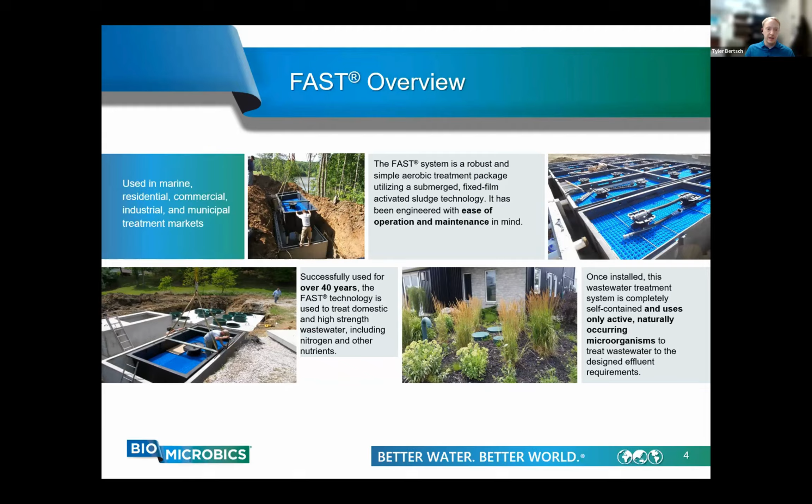The way it operates, it only uses naturally occurring microorganisms, which you see getting flushed down the drain and ending up in what would normally be a septic tank system.

So the advantages for attached growth: it's very easy to start up. There's no seed sludge needed. Essentially, once you have it installed and start passing wastewater through it, you begin treating wastewater within 7 days and you have full treatment within 30 days. It's very simple to operate. It has very good sludge thickening and settling compared to typical activated sludge systems, which you would see in suspended growth.

There's a reduced sludge production due to higher organisms which are present in wastewater. In terms of power and maintenance, compared to normal suspended growth activated sludge systems, we use much less power. Again, we only have that single moving part, which is just a blower. We can have a much smaller footprint than a typical suspended growth system due to the concentration of biological activity which is occurring on the media rather than growing within a large tank of wastewater.

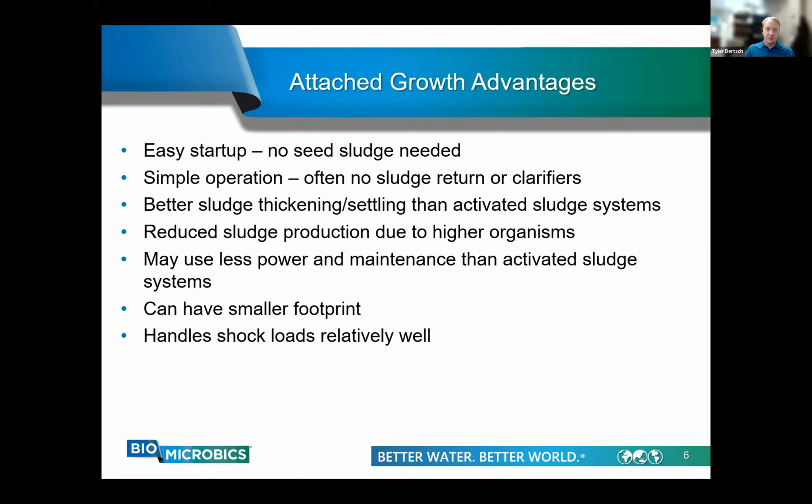Additionally, this sort of system is supportive of ammonia removal, and it's also more resistant to temperature fluctuations due to the fixed film nature of the bacterial growth.

Here's an overview of what sort of products we offer in our FAST line. A RetroFAST is typically for remediation or extending the capacity of an existing septic system. A MicroFAST is for a single family home or a cluster of homes up to approximately 125, 126 residents.

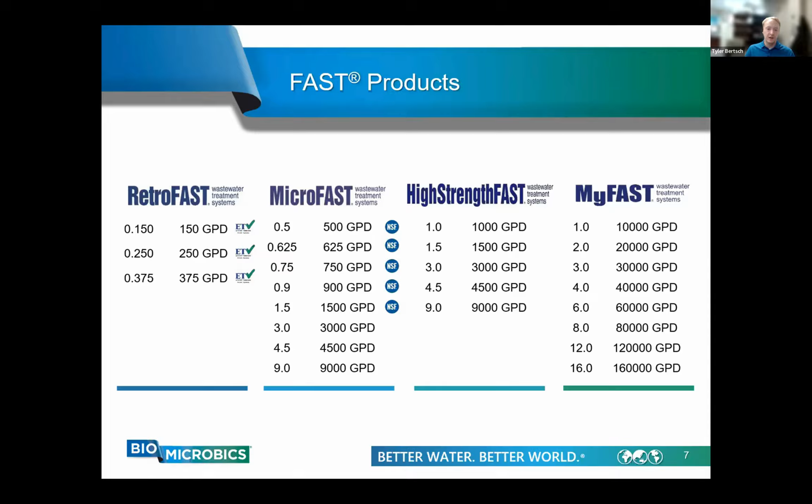Your High Strength FAST is for any situation where you have higher organic loading, such as restaurants, bars, coffee stands, commercial properties, agricultural or industrial facilities with organic effluents. And on MyFAST, we start getting into the several thousands to hundreds of thousands of gallons per day. That's ideal for multifamily properties, subdivisions, apartments, small municipalities, or even high strength commercial properties.

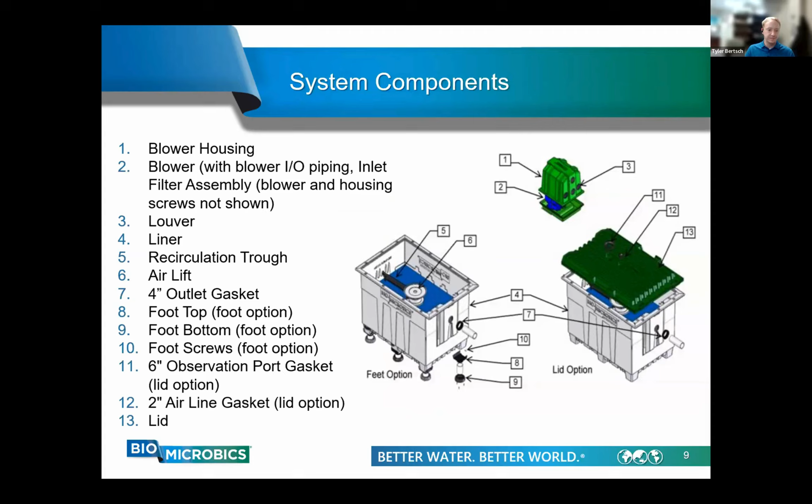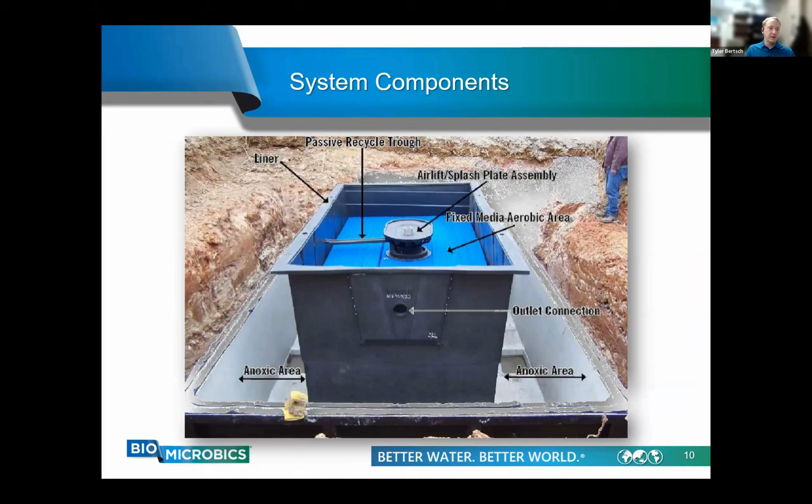Going back to this slide, you can see that the trough extends out of the airlift and goes to the edge of the liner. That is your return into the anoxic area, and that is what's actually facilitating the nitrogen removal.

The Sanitee has a built-in plunger which allows you to clean it in place simply by pulling the plunger up and down to dislodge any accumulated solids. Any wastewater which passes through the Sanitee ends up in the treatment tank, entering the anoxic zone.

The airlift serves as both an aeration and a mixing device, which pulls in the anoxic water up through the aeration zone and spreads it over the top of the media. This is where the biological activity occurs in terms of BOD and COD removal, and that's where the main treatment is happening. Outside of that is where your nitrogen removal is occurring.

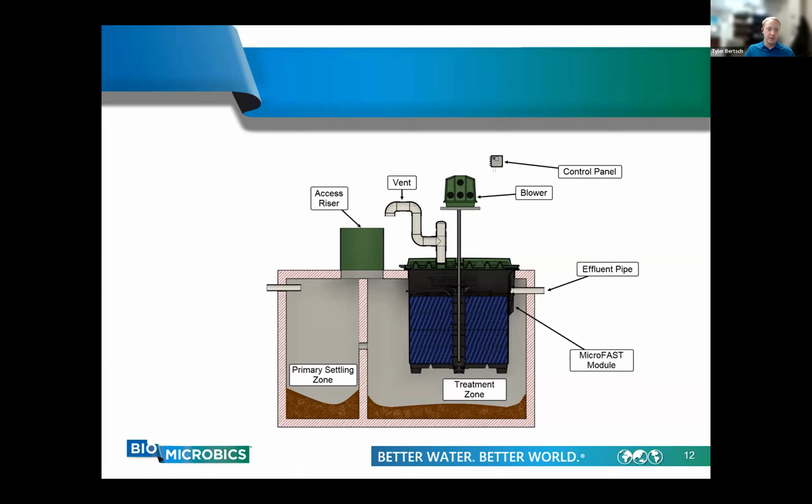Here's another blown up image so you can better see exactly what's happening with the primary zone, the treatment zone, the media, and your effluent discharge, along with the blower and the control panel which operates the blower. Here we have a quick video which shows the MicroFAST system in action.

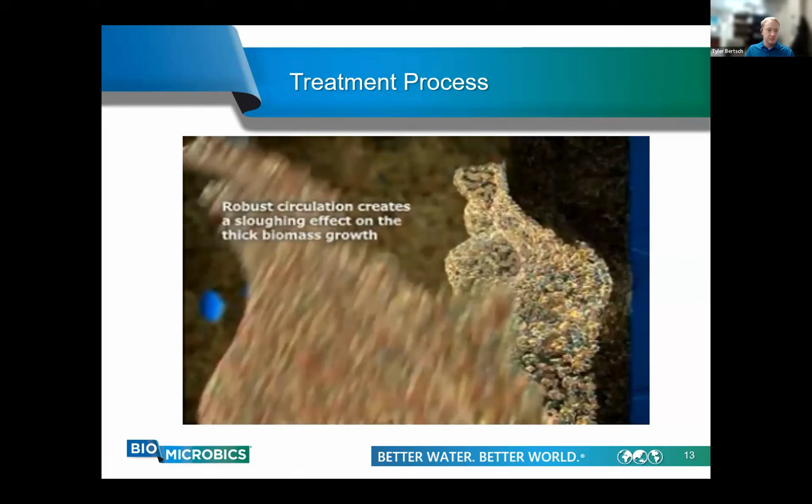All right, moving on.

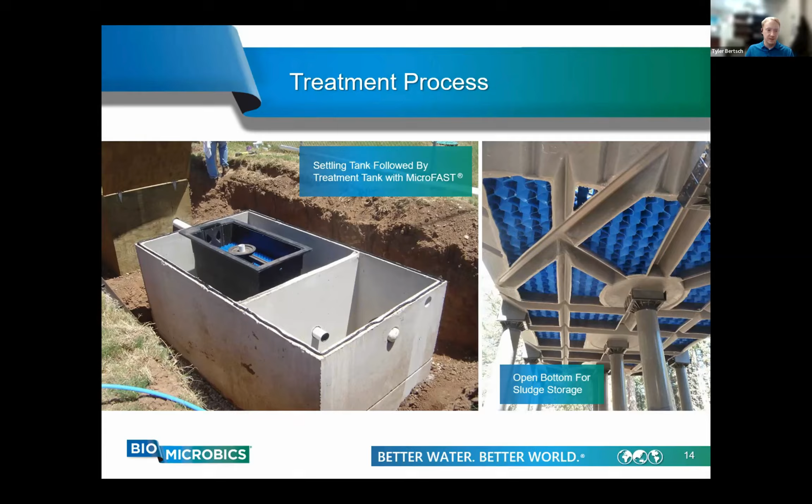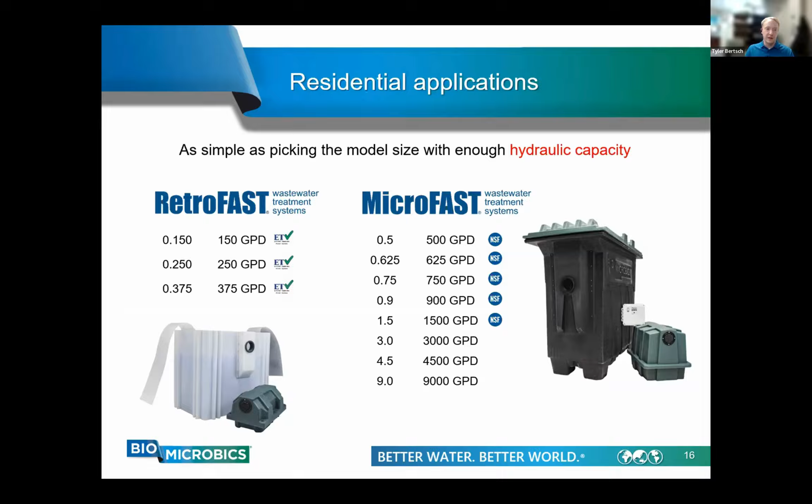Going into the sizing for the FAST system, there are two different ways to size this. For residential applications, you're simply picking a model which has enough hydraulic capacity. So if you're producing 300 or 400 gallons a day of wastewater, you'd be looking at a MicroFAST 0.5, which has a capacity up to 500 gallons per day. It really is as simple as that.

Our systems are designed with these parameters in mind. So any raw wastewater coming in for your RetroFAST or MicroFAST, this is what we're looking at: BOD, which is your biological load, of 300 parts per million or milligrams per liter, your solids of 300, nitrogen of 70, and your fats, oils, and grease of less than 40.

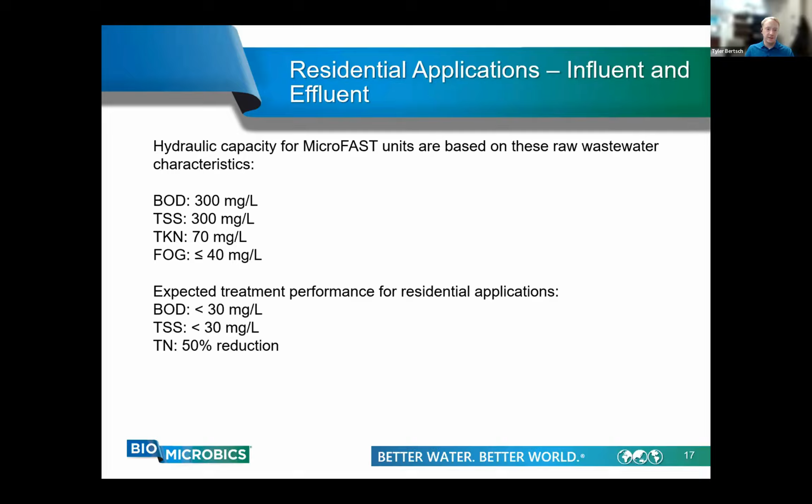Below that, with our typical MicroFAST system, our expected treatment performance for residential applications is less than 30 for BOD and TSS, and at least a 50% nitrogen reduction.

For commercial applications, we start getting into a little bit more here. So not only are we looking at the hydraulic capacity, we're also looking at the organic capacity, which is the BOD concentration. Each of these units is rated to handle a certain amount of BOD coming in, which we measure in pounds per day.

We use the high strength FAST when your influent BOD exceeds the standard 300 milligrams per liter mentioned previously for influent conditions. For example, if you had 1,500 gallons per day coming in with 1,000 milligrams per liter of BOD, that's approximately 12.5 pounds of BOD per day. We would select the 9.0 model, even though the hydraulic capacity exceeds the 1,500 gallons per day, because that's what's rated for 12.5 pounds a day of BOD. You'd have extra retention time, but that is in no way a detriment to your treatment process.

We also have the capability for additional nitrogen removal using our NitriFAST and ABC-N system. Our NitriFAST is used to convert the ammonia that's coming in, and your ABC-N is what's used for something called denitrification.

Nitrification is the process of converting ammonia to nitrates. Denitrification is turning those nitrates into nitrogen gas. These units will always follow a primary treatment system, and they use specialized media ideal for removing nitrogen compounds. Typically, nitrogen removal units have about the same hydraulic capacity as your primary FAST treatment unit, but have a smaller footprint. The nitrification and denitrification processes also produce less sludge than your main FAST unit for BOD and TSS removal.

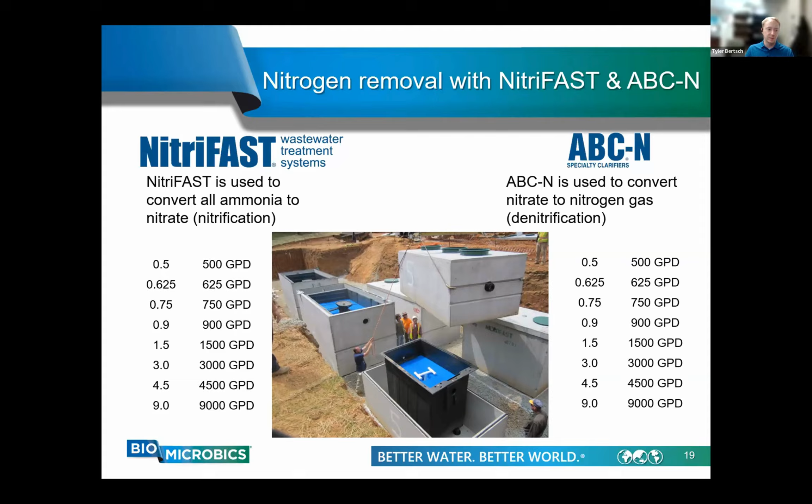Here's a quick block flow diagram describing different setups for nitrification or nitrogen removal. In your typical FAST system, this is what we're looking at for 50 to 75% nitrogen reduction. We include an additional recirculation, which recycles the effluent coming out of your FAST system back to the beginning, giving it greater time to undergo nitrification and denitrification. If you're including denitrification with an ABC-N or NitriFAST, we're then looking at the second diagram for greater than 75% nitrogen reduction.

With these, you can include an alkalinity source and a supplemental carbon source. Alkalinity is added because the nitrification process will actually make the water more acidic, part of the biological process occurring here. The bacteria performing this operation work best in a pH range of 7 to 9, so you need to regulate this because the water's pH can drop down into the 5 to 6 range. The general rule of thumb is you require 7.1 milligrams per liter of alkalinity for every 1 milligram per liter of total nitrogen removed.

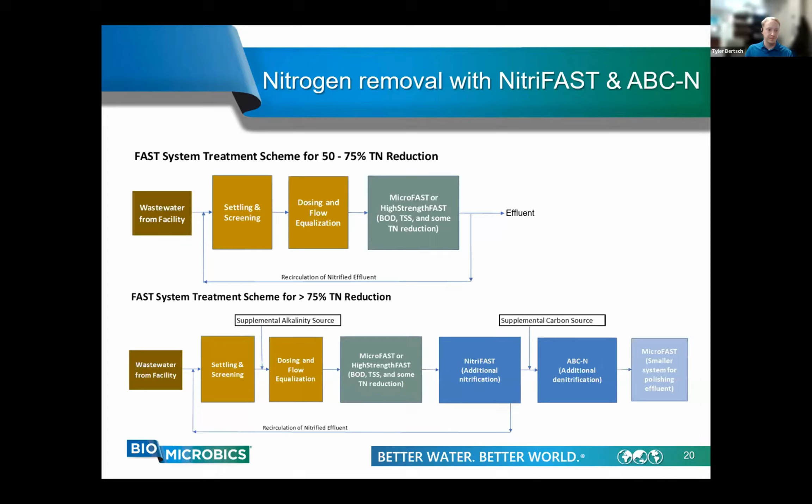And then I already touched on this a little bit. Complementary products for FAST: we already mentioned Sanitees, which are just effluent screens to prevent any sort of solids from entering the treatment tank.

We also have Lixor aerators, which are designed to reduce influent BOD by up to 50% prior to the FAST system. We often see these with larger systems such as your MyFAST, or they could even be installed in something like a MicroFAST 9.0 if additional aeration is needed but you don't need that hydraulic capacity. Sanitees are sized based on your influent flow rate, and Lixors are sized based on the installed tank depth and your BOD loading.

So going into community and municipal treatment, we begin looking at the MyFAST and the MacroFITT. The MyFAST and the MacroFITT are essentially just scaled up versions of your regular FAST modules with additional features you'd expect to see in municipal wastewater treatment systems, such as biosolid management systems.

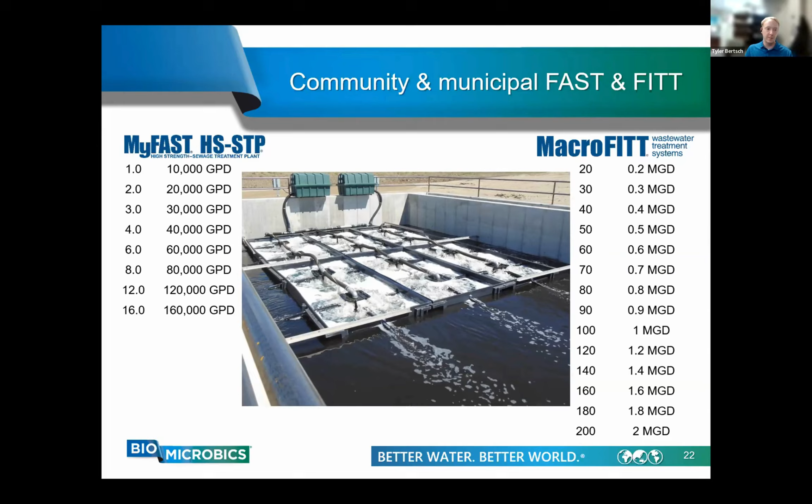Here's a block flow diagram of what you'd see for a typical MyFAST or MacroFITT process. You have your AMS, which is your aeration management system, your primary aeration and screening tank. Into there, you go into the actual treatment tank, which is your MyFAST with your attached growth, liners, and media. Any sort of settled biosolids go down and can be automatically pumped out, or an operator can just turn on sludge removal pumps, which then discharge into the BMS, which is the biosolids management system.

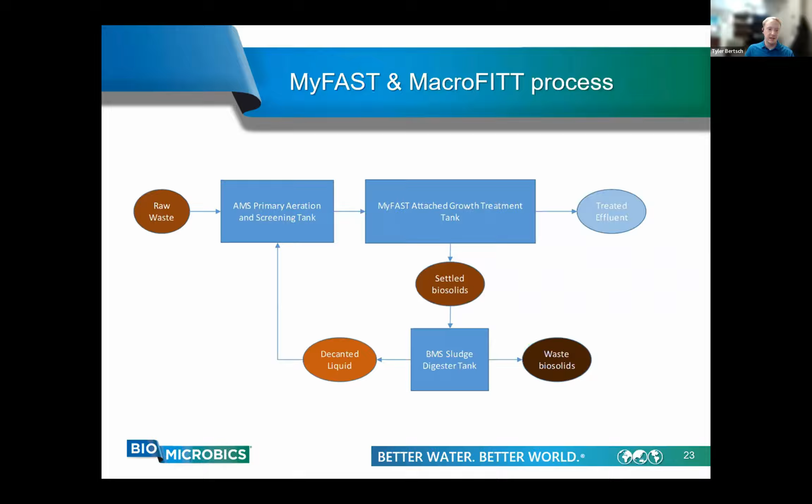From there, we can decant that liquid back into the treatment process, and any of the other waste solids can just be pumped out as needed.

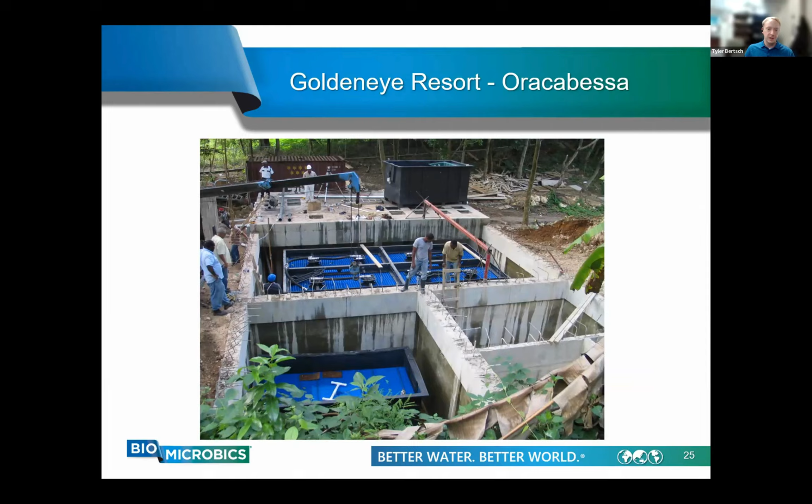As an example, Goldeneye Resort in Jamaica, this is a treatment system which Anthony will be speaking more about later, but it is currently in operation and it's used to treat wastewater from the resort, and it is used to produce irrigation water for water reuse.

Here's another system which is currently in operation in Mexico, Tren Maya in the Yucatan Peninsula. It was designed and built to service a railway station, treating about 50,000 gallons per day of sanitary wastewater generated from the passengers and employees at the train station. There was a strong pressure to preserve the local ecosystem, even though this was in a very remote location, which was hard to access and hard to service.

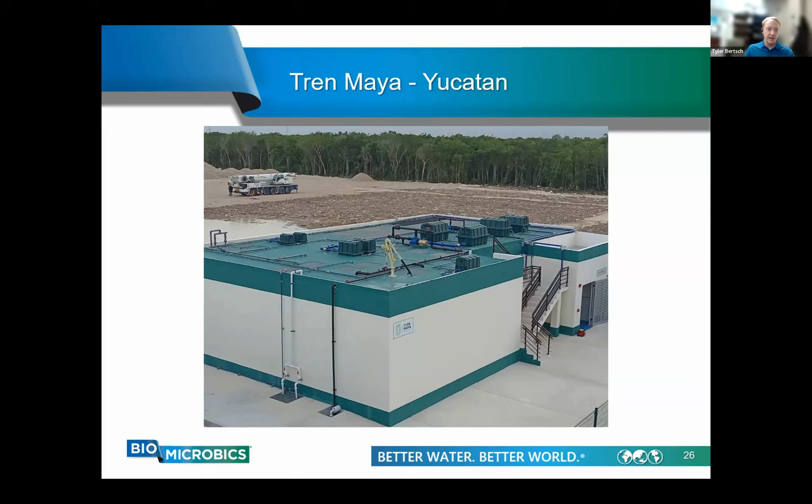The system was designed to mitigate environmental impact on the sensitive ecosystem and is currently successfully treating the wastewater to water reuse standards. It's able to be used for toilet flushing, irrigation, and any sorts of those purposes other than drinking water.

This is a site which I have visited myself, in Arlington, Tennessee in the United States. The previous wastewater treatment system had failed, and they contacted our distributor and BioMicrobics for a replacement unit. This unit was to be servicing a newly developed community of approximately 700 homes and needed to be treating about 120,000 gallons per day, with the flexibility to expand along with the community growth, which they anticipated.

A MyFAST 12.0 was installed, which is effectively treating the wastewater and is discharged to a large irrigation field to support water reuse. This site right now is currently undergoing expansion, and they are using an additional MicroFAST along with that as well.

What's to highlight here is these are modular systems. If you anticipate growth, it is quite easy to add additional treatment units in to provide that capacity that you need.

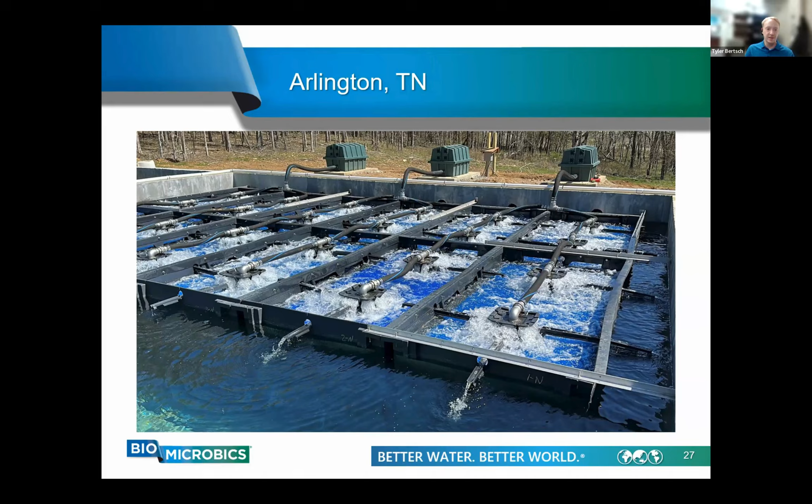Moving on to what would be our more advanced technology would be the BioBarrier, which is our membrane bioreactor. The membrane bioreactor is very, very different compared to our typical FAST system. It operates on different principles, and it produces a much higher quality effluent.

It uses a semi-permeable material, which filters out undesirable materials and produces very high quality effluent. MBRs are an established technology which have been used in municipal, commercial, and industrial wastewater treatment systems for a great number of years now. BioMicrobics has been developing and testing our own MBR technology for over 20 years now, and again, we mostly focus on decentralized applications and on-site water treatment for this technology.

So membrane types are differentiated both by their shape and by their pore size. Their pore size really dictates the function, and the configuration, whether it be flat sheet or hollow fiber, is both a preference and comes down to the needs of the user.

So the biobarrier, we are in the ultrafiltration range. As you can see on this diagram, from left to right, your pore size increases. With increasing pore size, you begin to allow more materials to pass through without being captured by the filter.

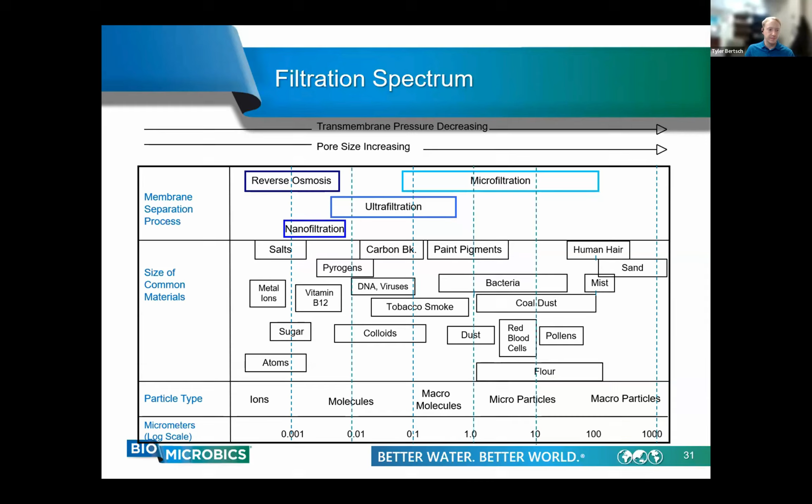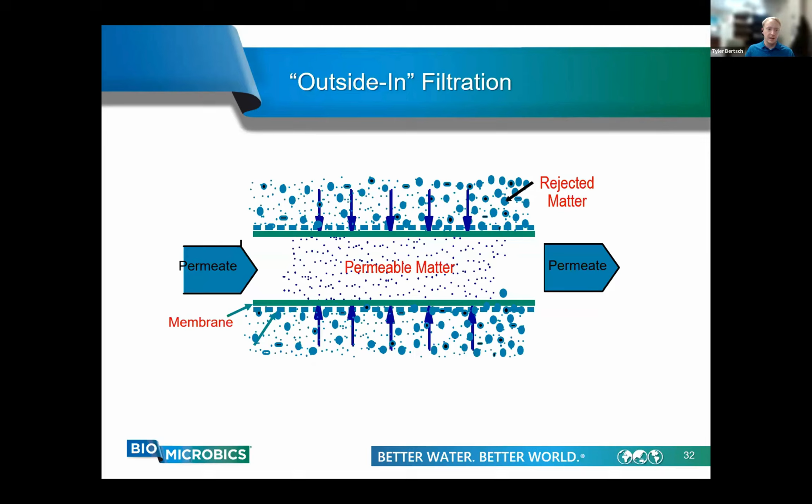So this is how the membrane system works. You can consider it as outside-in filtration. In between those two parallel green bars there, that's the inside of the actual membrane sheet itself. Water is able to pass through. The water molecule is smaller than the pore size, but any material above that ultrafiltration range is rejected. So that's where your solids, your bacteria, anything like that is left behind, and all you're producing is very clean permeate.

So why use an MBR over a typical FAST system? This is something that we can help you decide depending on your treatment needs and your effluent requirements. Any regulatory bodies might have requirements for you, and we can help you determine what product is best for your needs.

So comparing this to a typical FAST system, your BOD is going to be less than 5 milligrams per liter, and your TSS is going to be less than 1. Typically we see non-detectable levels. It's not uncommon to see non-detectable BOD and TSS in our effluent. Your turbidity, the water is going to be essentially crystal clear coming out.

Without any disinfection, as I mentioned, you're able to remove coliform bacteria. We have the capacity to implement nutrient removal such as nitrogen or phosphorus. The effluent is suitable for water reuse, whether that be toilet flushing, irrigation, fire water, and it meets surface discharge standards. We're able to meet the most stringent discharge standards when using this system.

So along with this system, there are some cons that people need to be aware of before they decide to implement this product. It is going to be more complex and more expensive. It does require a level of operator training and a level of understanding of the system to ensure it's operating properly, while the fast system is essentially set it and forget it. This system does require some maintenance.

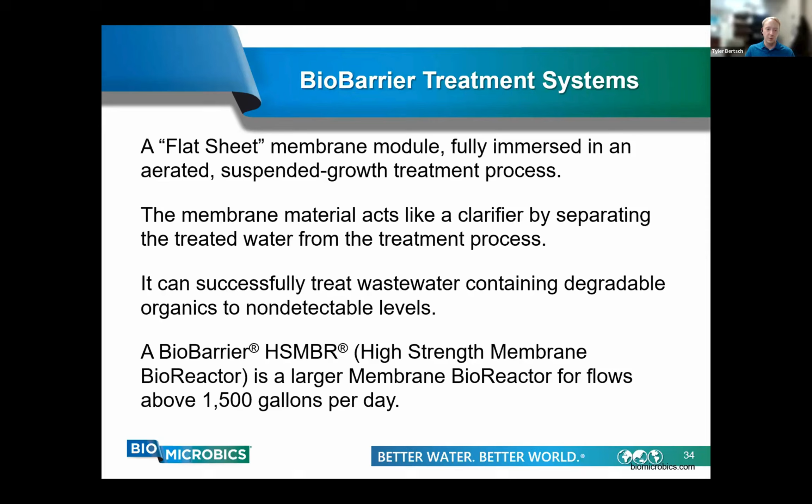Something of note here is that these operate very well with aggressive cleaning practices, which are commonly seen in medical facilities - we'll touch on that in a moment. These use a control panel which operates locally, but it's compatible with any third-party remote alarm system. There is a dry contact alarm output included in the control panel board itself, which is quite easy to wire up.

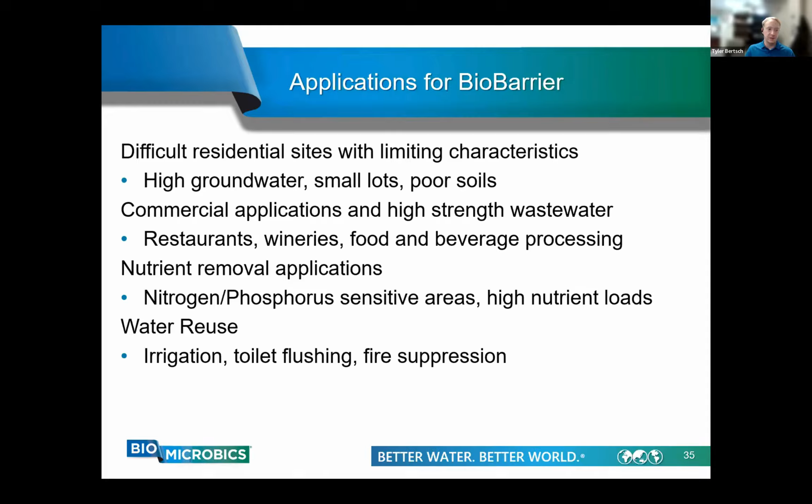So some applications for your biobarrier. It's good to use in places with high groundwater, small lots and poor soils, which can be difficult to discharge typical wastewater effluent onto. It's excellent for commercial applications with very high strength wastewater, such as restaurants, wineries, food and beverage processing. We have a specialized model to meet the needs for wineries as they are a bit more unique. We're able to provide nutrient removal, such as nitrogen and phosphorus, for sensitive areas, and it's great for water reuse applications such as irrigation, toilet flushing, and fire suppression water.

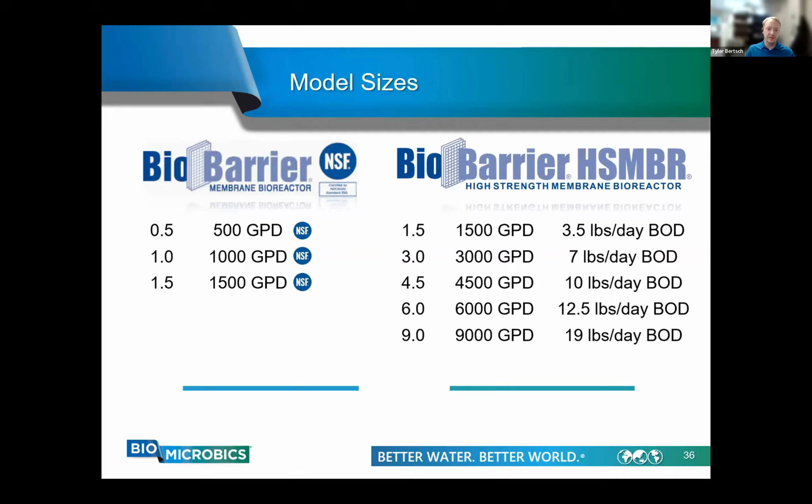The model sizes for our biobarrier are sized pretty similarly to our FAST systems. The standard biobarrier model is based on hydraulic flow rate, and the high strength biobarrier is sized based on the biological load, the BOD, and the hydraulic loading.

Here are some examples of our products both being installed and in operation. Top left here is a biobarrier unit currently in installation before the tank has been filled. The top right is a food processing facility, and the bottom left is a winery project. It's worth noting that commercial facilities might want to use multiple trains to allow for redundancy. This allows for constant effluent production while one of the membrane units is being cleaned, replaced, or in a long-term relaxation cycle.

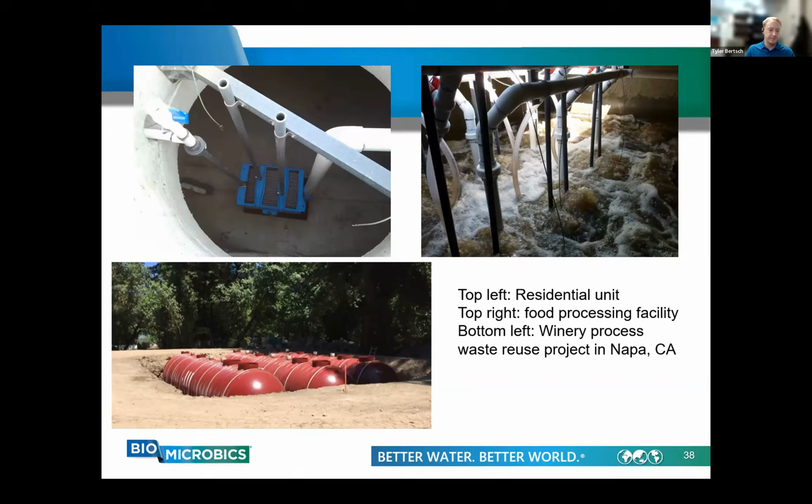We do have the capacity here to provide anoxic recirculation for nitrification and denitrification. That's not pictured here, but we'll be seeing that coming up. And finally, the membrane module itself, listed as number 4, is filtering out your treated wastewater and then discharging it.

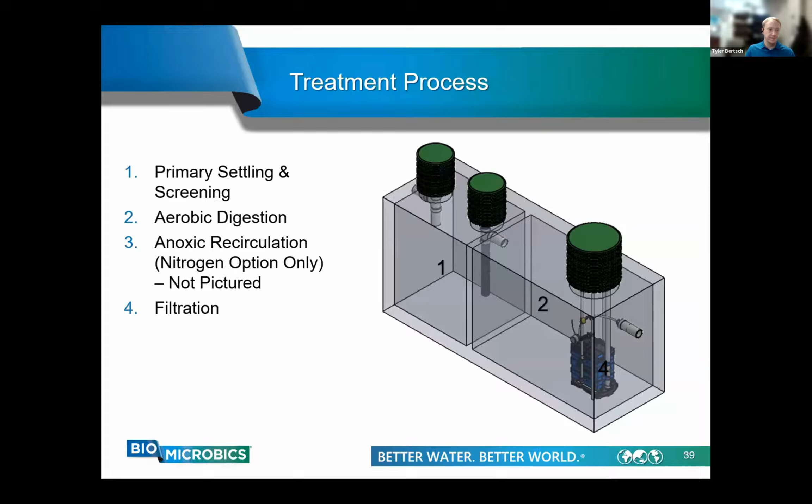I mentioned aerobic digestion, which is what both the biobarrier and the FAST systems work with. In the biobarrier, organisms are suspended in the mixed liquor, as opposed to the FAST system which uses fixed film growth. Air is supplied by coarse bubble aeration, which allows for both mixing and aeration, and to clean the membrane panels themselves on the biobarrier.

The air supply rate needs to be calculated for non-residential applications. That's something we take care of here at BioMicrobics, or with your vendor or distributor, and we'll make sure it's sized appropriately for your needs. There's no need for the customer to be involved with calculating aeration requirements.

This is a general layout for what you would typically see in a residential application. Again, wastewater comes in, goes into the settling tank, fine solids are screened out, and then it passes over into the aerobic digestion tank where it is vigorously aerated, and the effluent is screened out using the membranes and then discharged.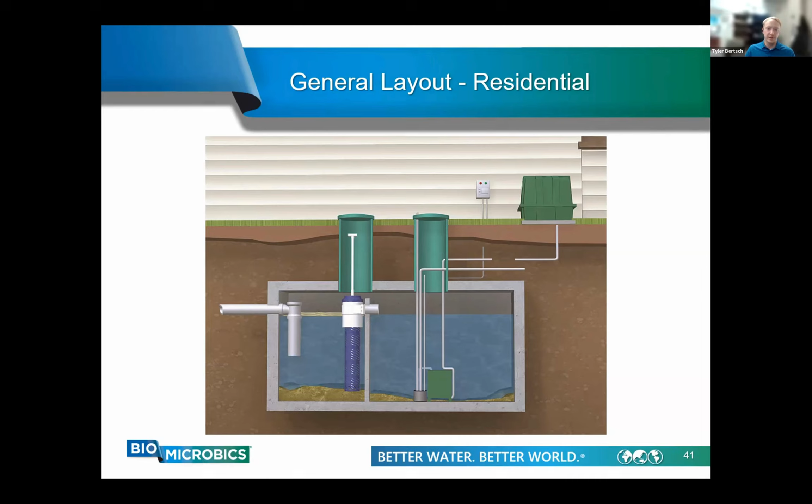It's worth noting here that the SaniTEE again has that plunger available, visible for your clean in place, just to dislodge any accumulated solids or anything that may be at risk of clogging the screen itself.

Here are some system components that you would typically see with your biobarrier. You're going to have your blower housing and blower assembly along with your control panel, which is what you'll also see with a FAST system. Your SaniTEE, which is a requirement for your biobarrier, but optional for your FAST system.

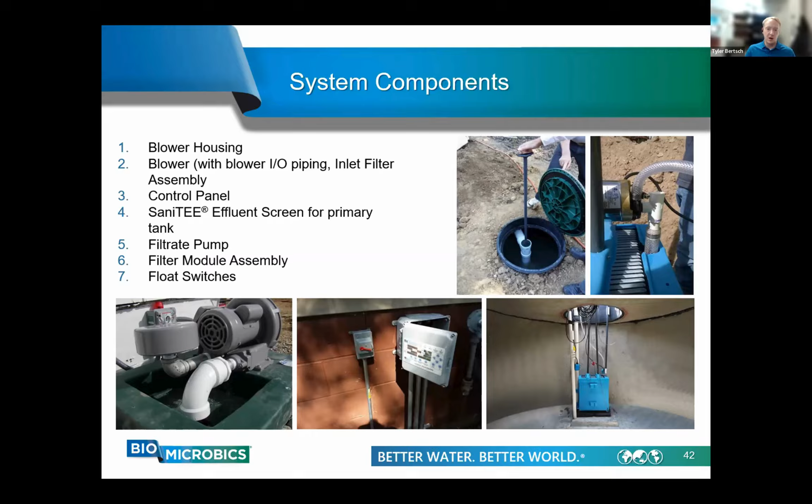What's different here is we have a filtrate pump, so the water that is screened by the biobarrier is pumped out rather than gravity flow out compared to the FAST system. You also have your filter module assembly, which contains the housing, the aeration unit, all of your clean in place requirements, your aeration tubing, and any hold downs needed for the biobarrier itself. Along with this comes float switches, which can trigger a high level alarm so you know if the biobarrier is not functioning properly and not discharging the proper amount of water, so you know the system needs to be cleaned.

So moving into the high strength MBR variant. These are ideal for multifamily residential systems where high quality effluent is needed. We'll be looking at some of those cases later on here. It's also ideal for commercial and agricultural or industrial facilities with high organic loading.

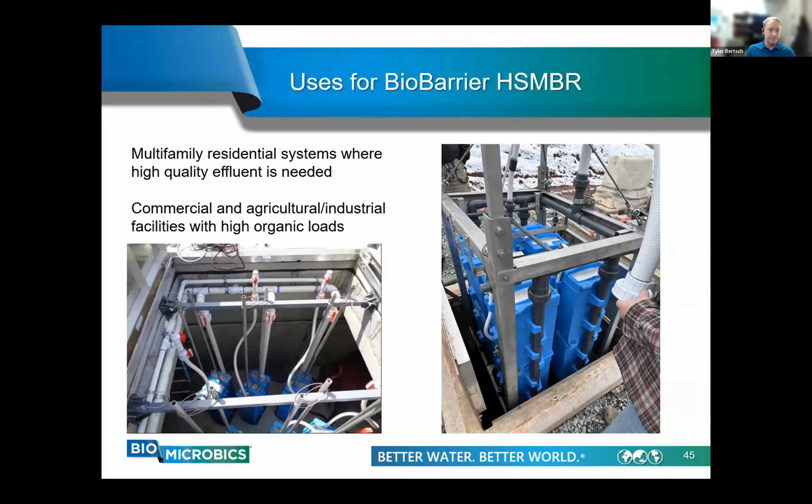So here we're looking at a high strength MBR for BOD, TSS, and ammonia reduction. This would be a standard configuration, so we would not have an anoxic zone. This is ideal for BOD and TSS reduction. You do also see quite a bit of ammonia removal here, but we were not really going into nitrate reduction because we do not have that anoxic zone, which facilitates that nitrate reduction through denitrification.

It is worth noting here that an equalization tank is optional, and this alkalinity feed is listed purely as an example of if there's not enough alkalinity in the incoming water to facilitate your ammonia removal, going back to that ratio which we touched on earlier.

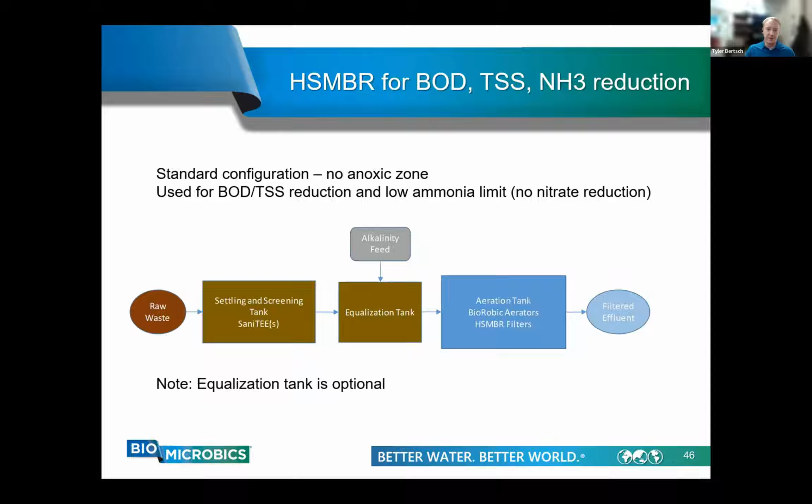So I mentioned before that this system does facilitate nitrogen and phosphorus removal. We're going back into that alkalinity and carbon feed to meet those requirements. We can achieve total nitrogen concentrations of less than 10 milligrams per liter when you include the anoxic tank.

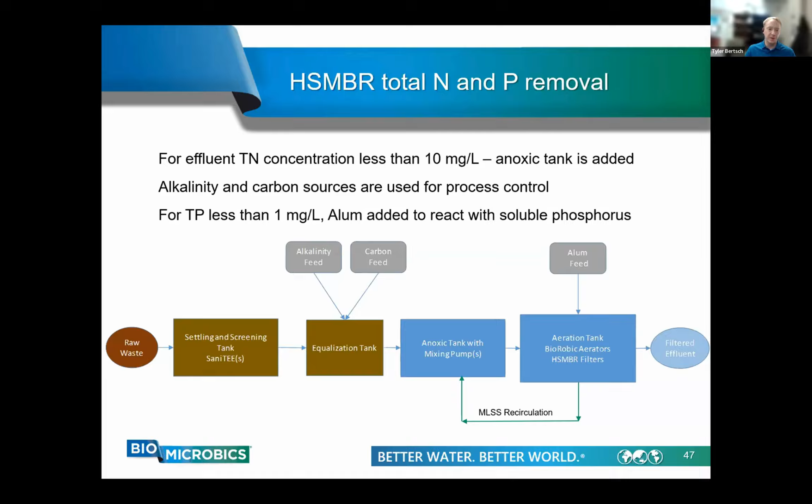The alkalinity and carbon sources are again used for process control. For phosphorus removal, we typically include an alum or a ferric chloride chemical feed, which reacts with the phosphorus. What that does is it binds with the phosphorus and causes it to precipitate out as a solid, which is then able to be screened out by the biobarrier unit. The result of all of this is filtered effluent with low nitrogen and phosphorus content.

So I briefly mentioned this before, for sizing your high strength biobarrier, it's going to be sized based on hydraulic capacity and your organic capacity, your BOD loading, which is coming in. Any sort of biobarrier which is designated with the -N is stating that it is for nitrogen removal as well. And I did mention those special winery versions which are available.

In this example, we have 3,800 gallons per day coming in, and we have a BOD load of 20 pounds per day. We don't have a listed biobarrier unit which is rated for 20 pounds per day. But if we include a BioRobic 2.0, which is capable of removing 10 pounds a day per BOD, we're able to go from what could have been a 9.0 plus another smaller unit or multiple 4.5 units down to a single 4.5 unit and a single BioRobic 2.0. So again, this really does help with saving on membrane costs, maintenance costs, anything like that.

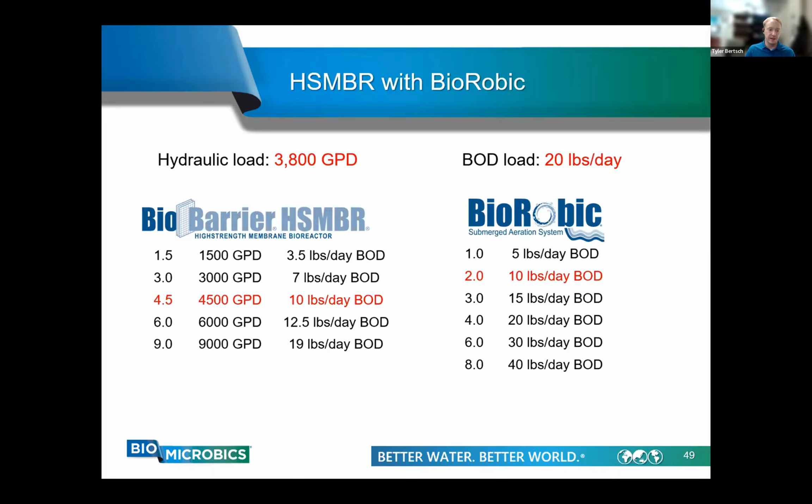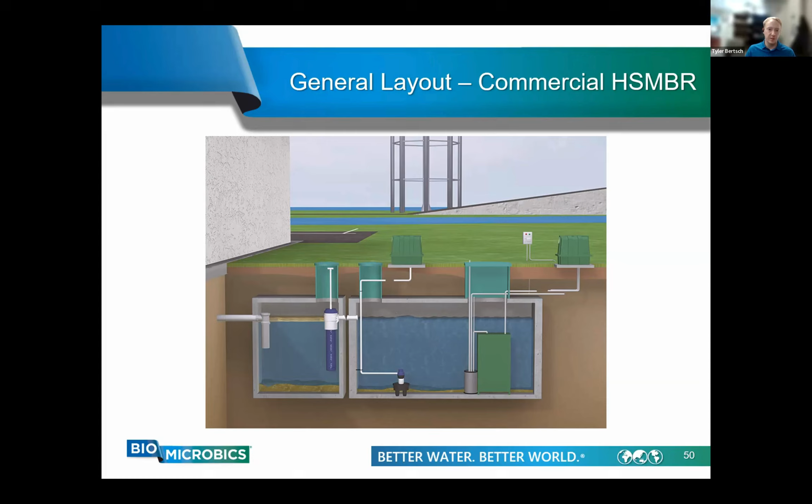In typical treatment systems, that would be very difficult to treat, but using membrane technology, we're able to treat these difficult wastewaters down to BOD levels which are non-detectable, and total nitrogen below 7 milligrams per liter.

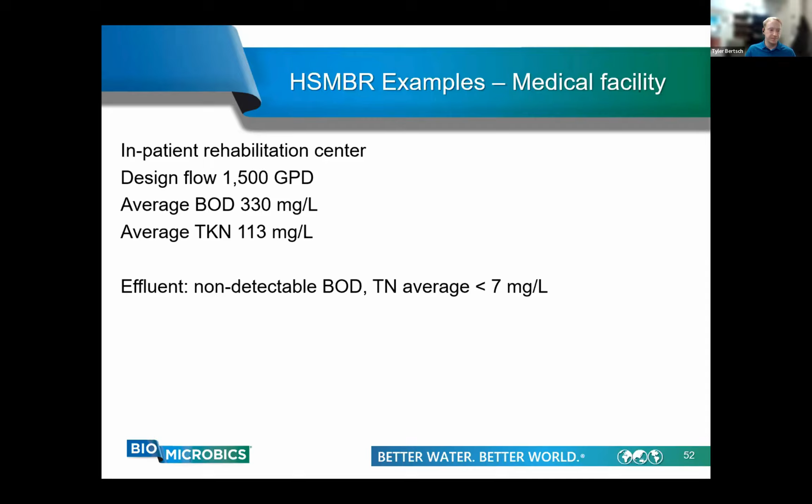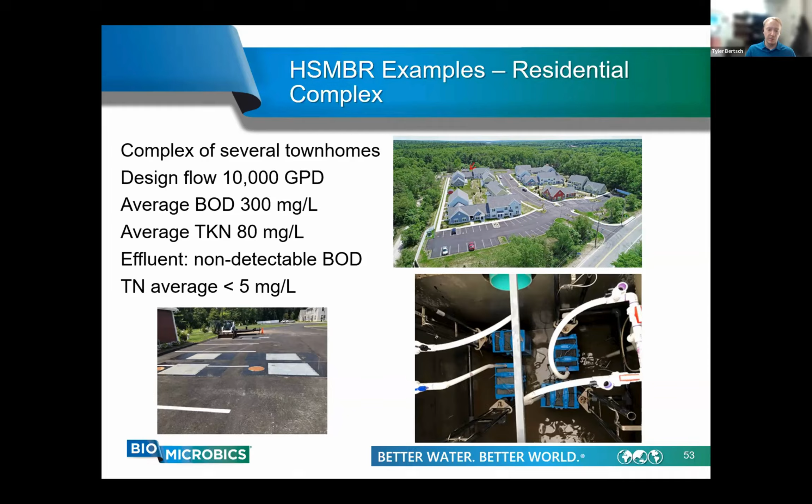The effluent has been tested on multiple occasions since it was put into operation in 2019 and has consistently been below that regulatory threshold. At this time, the system is still operating and serves as a high-performing reference for all of our other projects with strict wastewater restrictions.

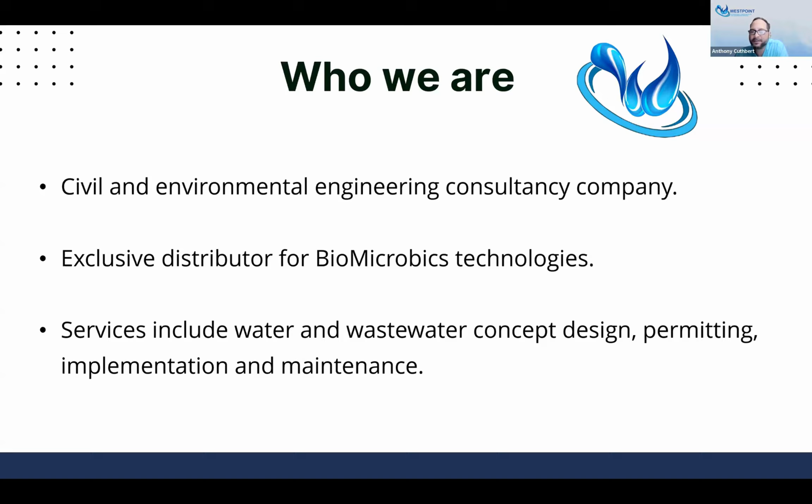Our mission at Westpoint is simple yet powerful: to provide innovative, sustainable, and compliant water and wastewater solutions that streamline development while protecting our environment.

We focus on 3 pillars that guide everything we do: sustainability, solutions that tackle challenges at every scale while preserving our precious resources for generations to come; efficiency, strategies that maximize output, minimize waste, and deliver results that matter; compliance, a steadfast commitment to regulations and safety standards, ensuring public health is protected now and in the future. Now imagine how these pillars can transform water and wastewater management, creating smarter, safer, and more sustainable communities.

With our mission and guiding pillars in mind, let's look at how this translates on the ground into real operational impact. Westpoint is proud to introduce 5 state-of-the-art biomicrobics plants strategically located to serve communities efficiently and sustainably in Jamaica.

These plants are the Golden Eye plant in Oracabessa, St. Mary; Silver Sands in Trelawny; Bessa Living, also in Oracabessa, St. Mary; Portway 2 in Cherry Gardens; and Palm Beach in St. Ann. These 5 plants are more than infrastructure. They are living examples of sustainability, efficiency, and compliance in action, delivering on our promise to their communities and the environment alike.

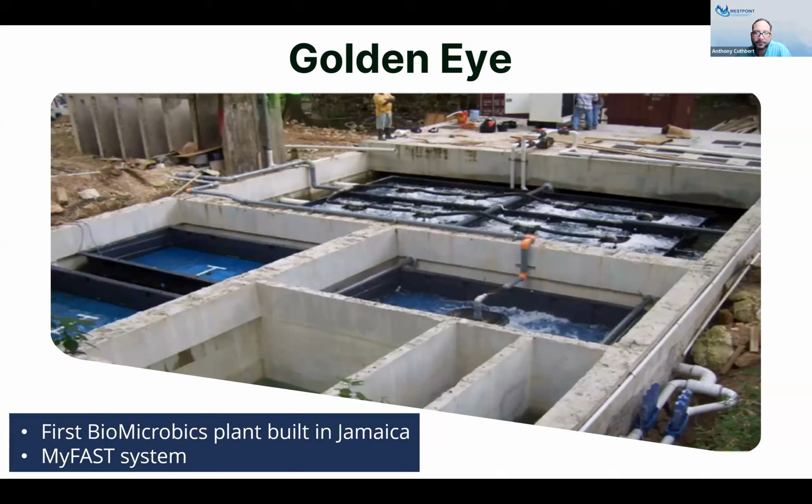The Silver Sands development boasts one of the best beaches in Jamaica. With this in mind, homeowners were looking for a solution that would not affect the quality of the ocean water in the bay. The original facility that was designed when the development was in its initial stages of construction showed signs of degrading ocean water quality based on sample testing performed by the Homeowners Association.

The wastewater treatment plant designed for this facility has the following attributes. It is MicroFAST 9.0, capable of treating 9,000 gallons per day. It has a reed bed associated with it for nutrient removal. The effluent disinfection incorporates the use of chlorine tablets. Treated effluent is disposed into a soakaway pit adjacent to the beach, and the facility has a footprint of 27 feet long, 10 feet wide by 8.6 feet deep.

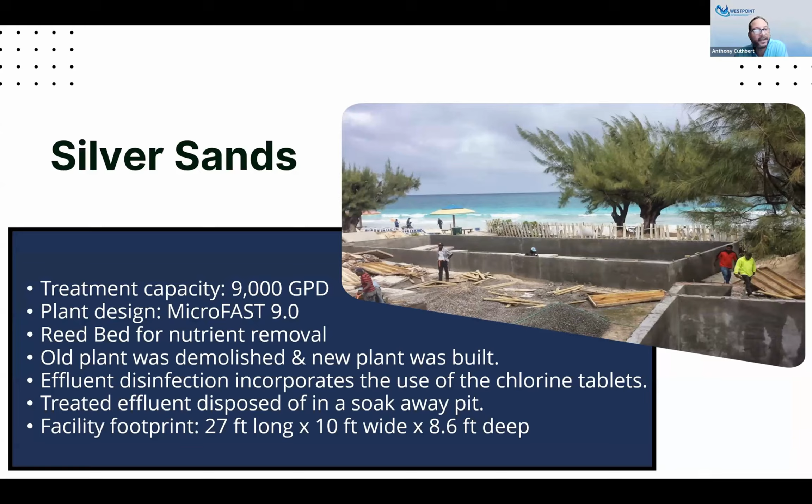The first BioBarrier HSMBR membrane system that Westpoint built in Jamaica was for the Bessa development in Oracabessa. Special requirements for this project were as follows: the property is located next to a river and is on the ocean. The public beach serving the community also serves as a turtle nesting ground. As a result, effluent quality is of paramount concern.

This development had an old defunct wastewater treatment plant that needed to be demolished to build a new one.

Westpoint acquired this job for the following reasons. We were able to cut the price for the wastewater treatment plant by $500,000 USD as compared to our nearest competitor by utilizing the old wastewater treatment plant reactors to house the new HSMBR equipment.

We were able to also gain an irrigation permit from NEPA to use the plant effluent as an irrigation source for common area plants. Part of the old wastewater treatment plant concrete reactors were also repurposed into an effluent storage tank to store effluent produced from the new HSMBR plant.

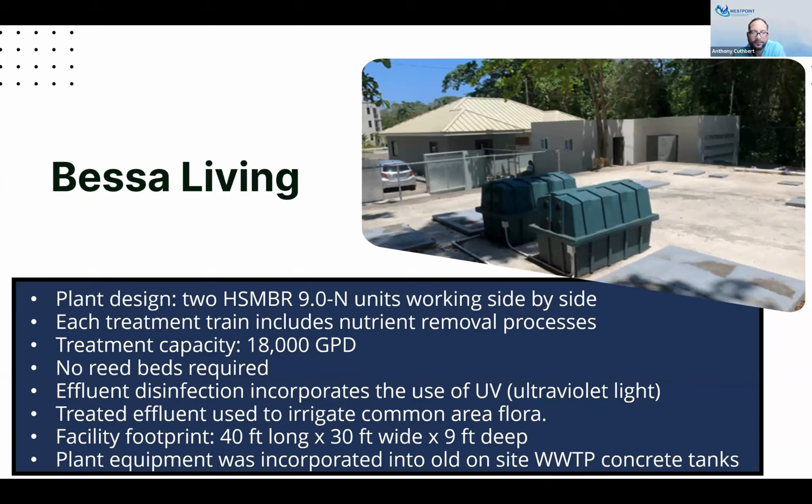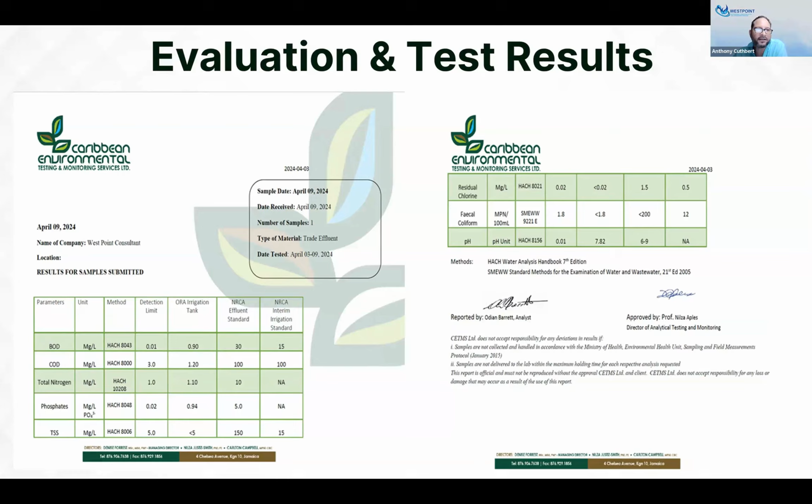Upon completion of this facility, we took an effluent sample test, and the results show that the plant meets all NEPA requirements, hands down. The effluent is just beautiful in nature. It's non-polluting. It is so good for irrigation purposes.

The second biobarrier system that Westpoint built in Jamaica was for the Portway Phase 2 development in Cherry Gardens, St. Andrew. Phase 1 of this development utilized a standard septic tank and reed bed system.

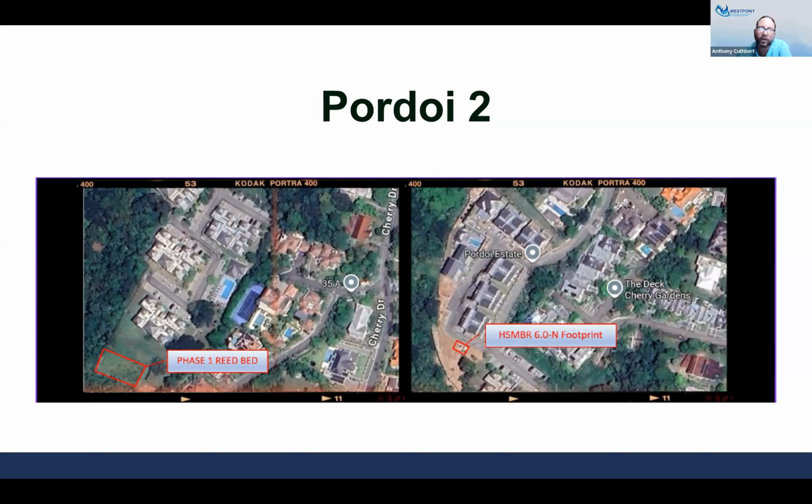Looking at the picture on the left, you all could see that the reed bed footprint is almost the size of one of the building block units, one of the blocks of buildings. You can also look at the right picture and see how small the footprint is for the HSMBR 6.0N that was built for Phase 2. These two pictures show the space-saving requirements that developers can gain by utilizing BioMicrobics treatment products in their designs for their developments.

The wastewater treatment plant designed for this facility had the following attributes. The plant was a HSMBR system capable of treating 6,000 gallons per day of wastewater. The plant itself includes nutrient removal processes. As a result, no reed beds are required.

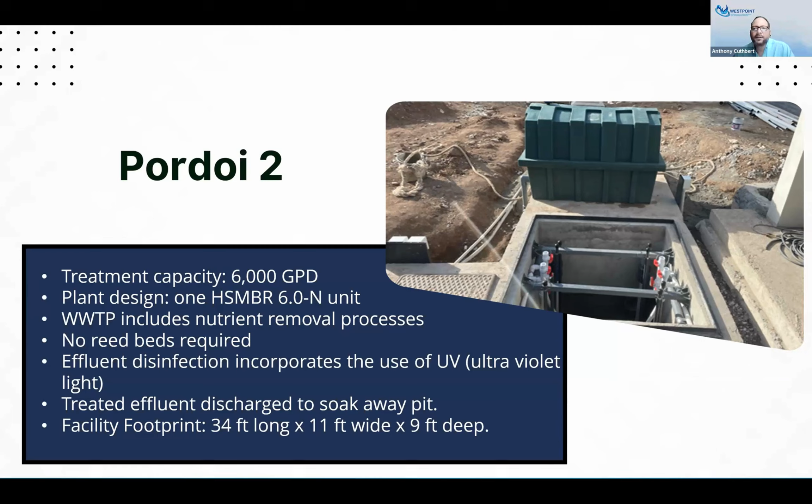The treated effluent is discharged into a soak-away pit, and the facility has a footprint of 34 feet long by 11 feet wide by 9 feet deep. This is a short video of the quality of the effluent from this unit.

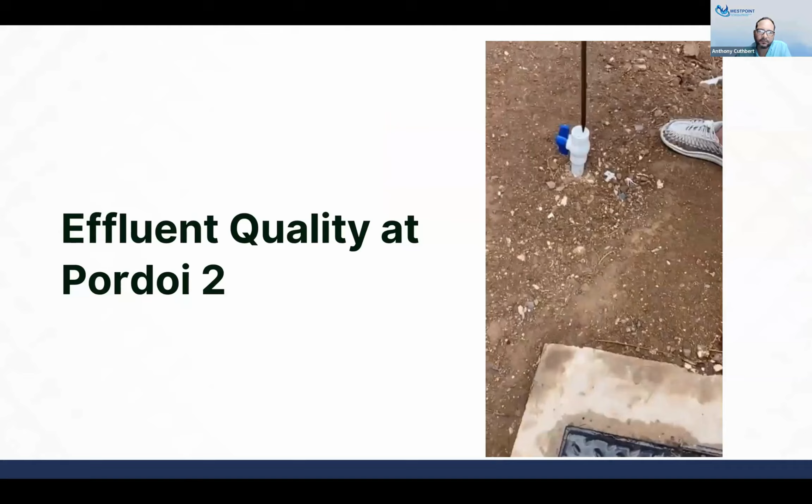Just like a plant at Pordoi 2 produces crystal clear effluent that could be used as irrigation should the homeowners decide to implement a system. Unfortunately, that water is currently going directly into a soakaway pit.

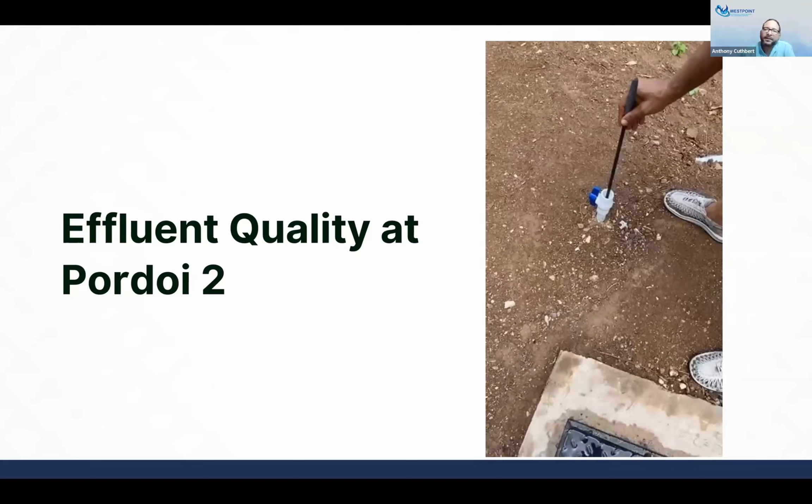The first MyFast plant Westpoint built in Jamaica was for the Palm Beach development located in St. Ann. This development is on the ocean, and there was a concern about salt air. Owners wanted a facility that would be sturdy enough to stand up to those elements, and they chose the MyFast system for that purpose.

This MyFast facility includes nutrient removal processes. As a result, no reed beds are required. And the plant has a footprint of 47 feet long, 39 feet wide, and 11 feet deep.

The tank also has no top slab, which allows access to visually look at the bits and pieces that are with the system.

Currently, the facility has been completed, and we are waiting for the pump station to fill up the reactors to the required water level for treatment to begin. As a result, we currently don't have any effluent test results for this facility because it's not operating fully as yet, but I should have those shortly.

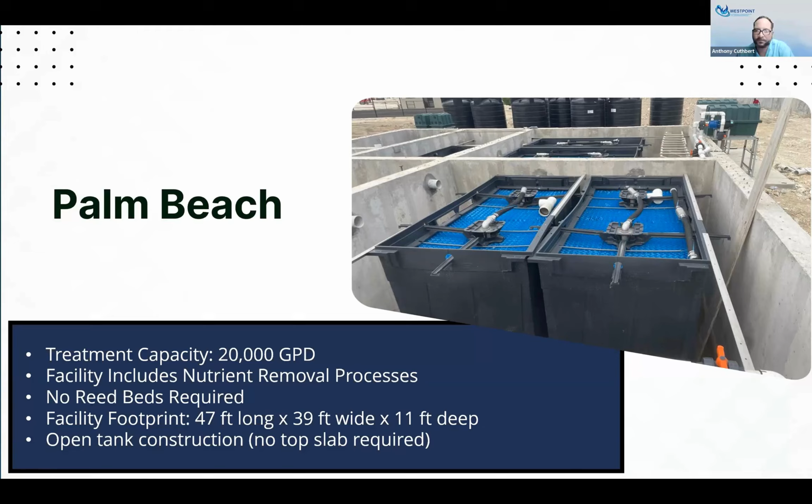These systems bring several important benefits to the Jamaican market. First, the high treatment efficiency. Fast systems provide around 90% removal of BOD, TSS, and COD, outperforming systems that do not utilize fixed film technology. The biobarrier MBR produces effluent clean enough for direct reuse without additional polishing.

These systems are also modular, scalable, and cost efficient. A major advantage for developers is modularity. Treatment plants can match the phases of a development instead of forcing a developer to build a plant at 100% and upfront those costs.

By using a modular design, you're able to phase out the cost of your wastewater plant to match the treatment of your phases in the development.

These facilities also utilize a smaller footprint. The concrete tanks used to house the BioMicrobics equipment require far less space than traditional wastewater alternatives. They also eliminate the need for large unsightly reed beds. For developers, this means reclaiming valuable land that can be used for revenue-generating features, more homes, additional parking, green space, or community amenities like swimming pools or pickleball courts.

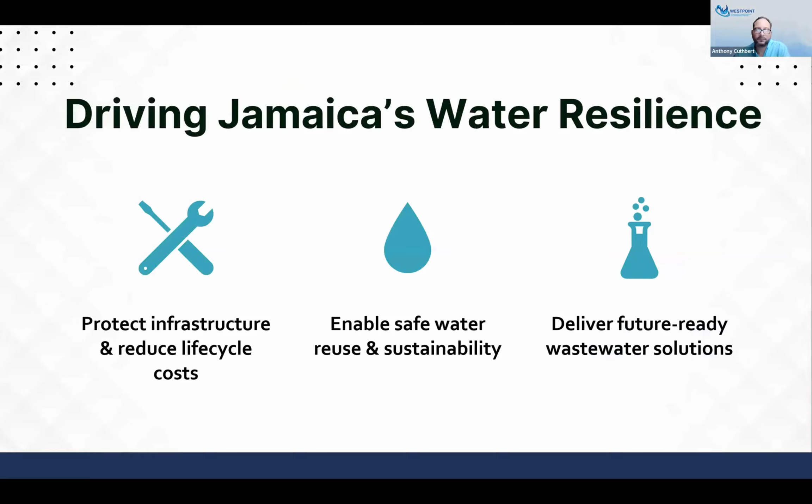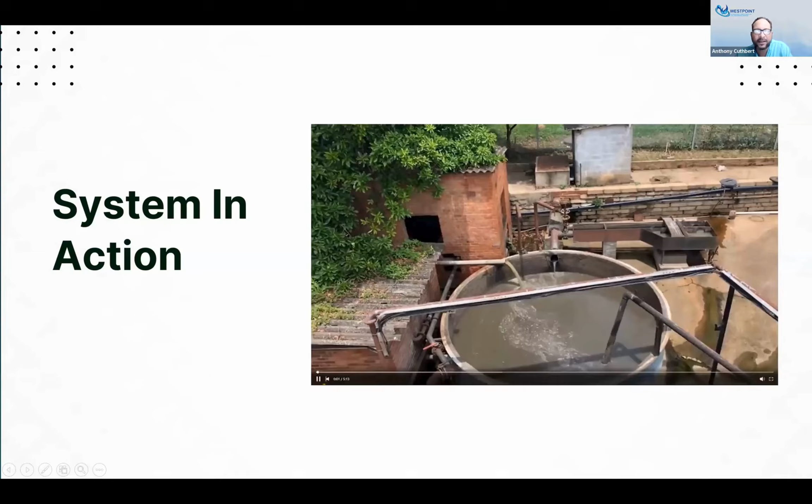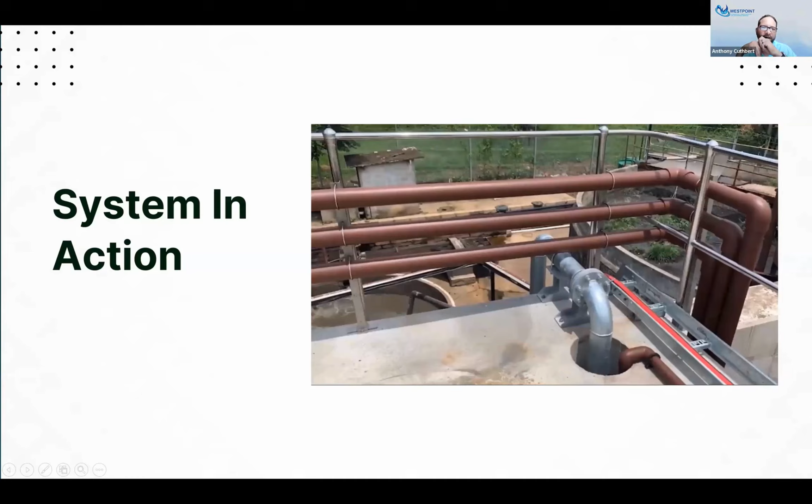Now, before I leave, I would like to show you all this video. I believe it's important because this is a MyFast 16, which treats 160,000 gallons per day. The facility is located in South Africa. It's built right next to the old technology, the old plant that was polluting the environment.

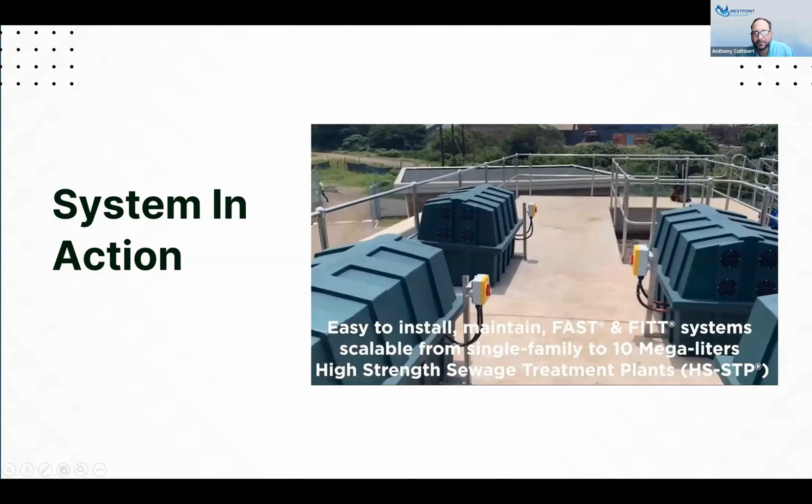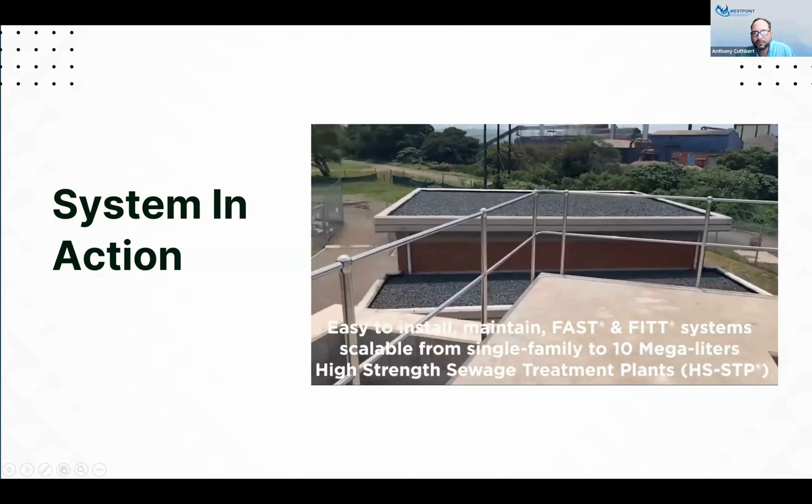That's your BMS zone. These are the blowers attached to the BMS zone. To your left, to your right are the blowers that enter the screening tank. These tanks have Lixor units to decrease BOD. As you see, these units are the aeration side of treatment, which is this chamber. As you can see, we have the FAST units lined out, and the only moving part is adding air to them, and all these blowers are on top and easily accessible by maintenance crews.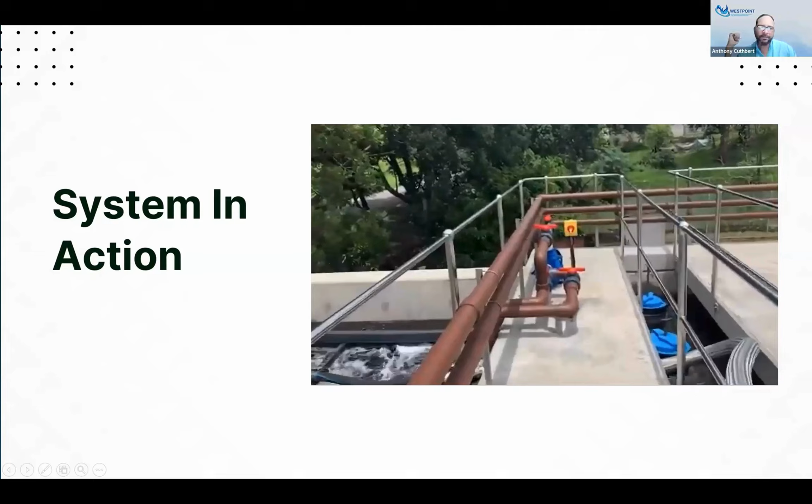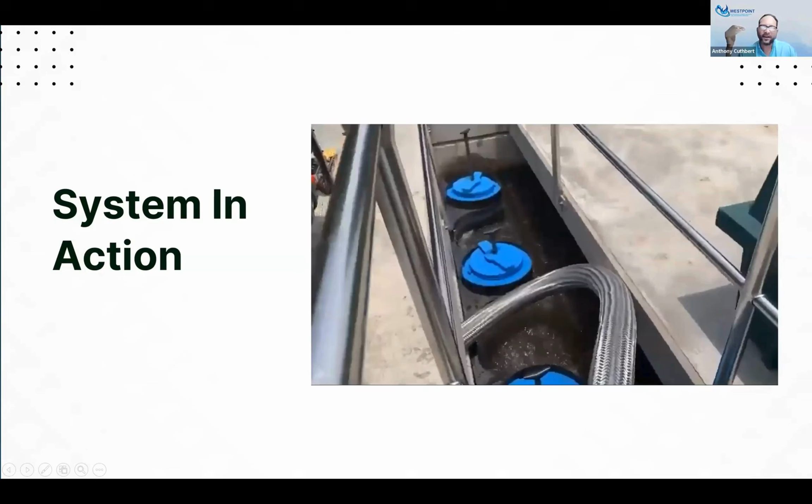This facility only has one moving pump in the aerated zone that takes sludge from that chamber back to the BMS zone. The BMS could be considered to be a digester in similar systems. You thicken sludge, they become cannibalistic and eat each other, and eventually you get a third-party cesspool service to come and remove sludge and dispose of it properly. So this is what a 16,000 gallon per day system looks like in terms of size and layout.

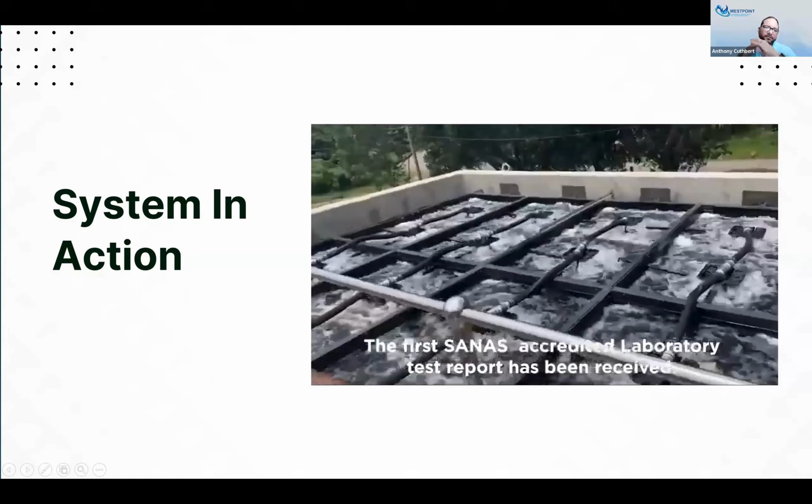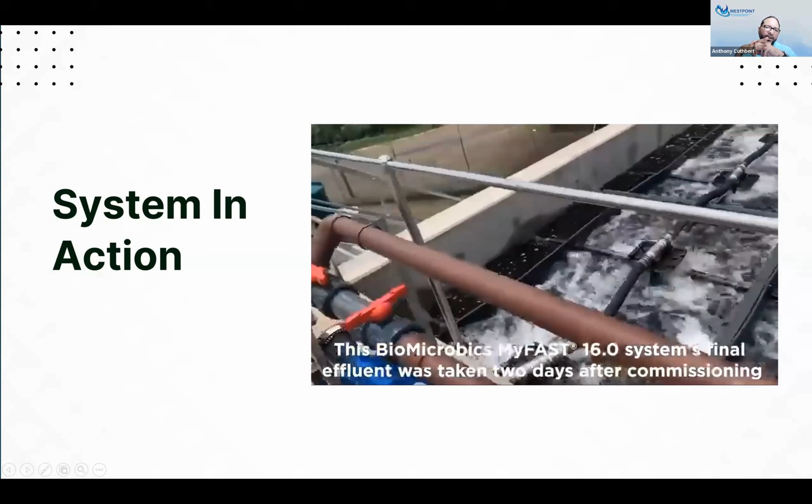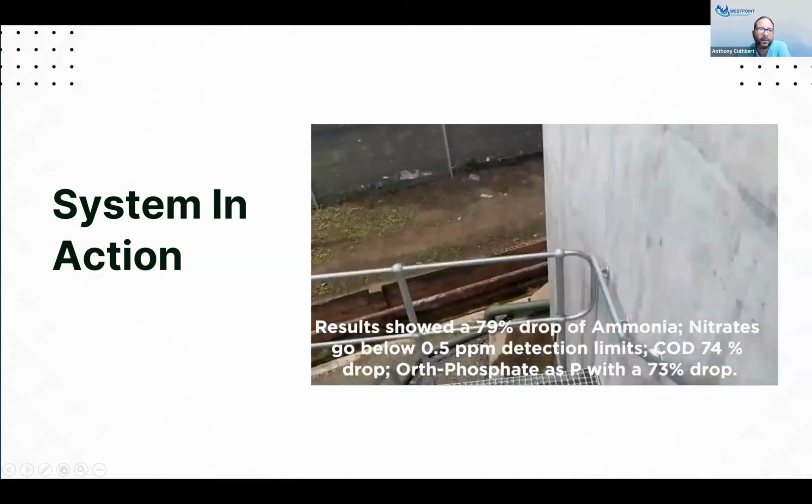The guys in South Africa were getting exceptional nutrient removal from this system, as well as BOD, COD, and TSS removal compared to what they had or what they were using previously. So they had a 79% drop in ammonia nitrates, going below 0.5 ppm, COD 74%, phosphates dropped 73%, as compared to samples tested from the old defunct plant.

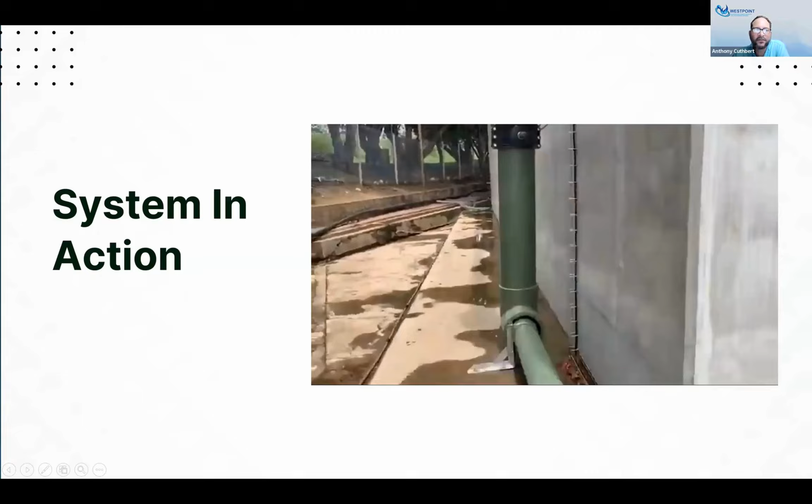But here is where this video is important. This is the pipe leaving the system. So these collect the wastewater, the finished product from the treatment plant. I believe this tank stores some, whether it be for irrigation purposes or to be used as sample collection for testing.

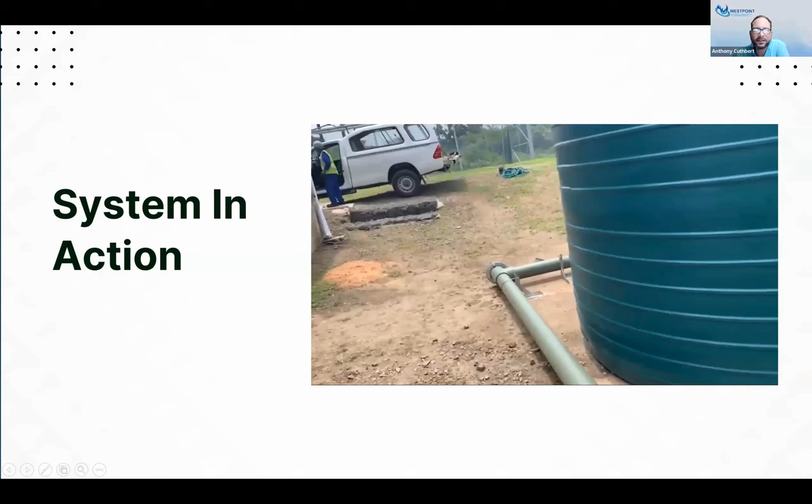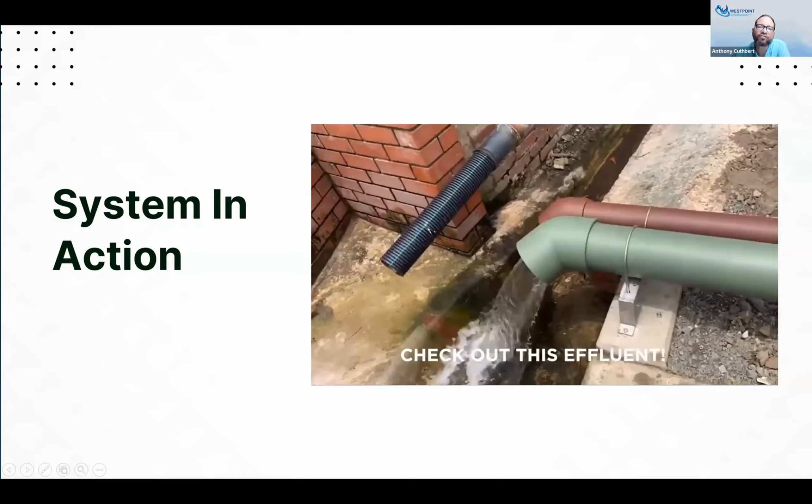But what is important is this. I just want you all to see what a BioMicrobics system produces. Look at the quality of that effluent. That is drinking water quality. It's not drinking water, but I don't think you've ever seen another plant in Jamaica produce water that clear. And that is what this system provides developers, provides government agencies. It's a protection of our environment, and it enables us to provide additional reuse properties, which protects our water resources.

That is the end of my presentation. I shall now put you all back onto Tanya.